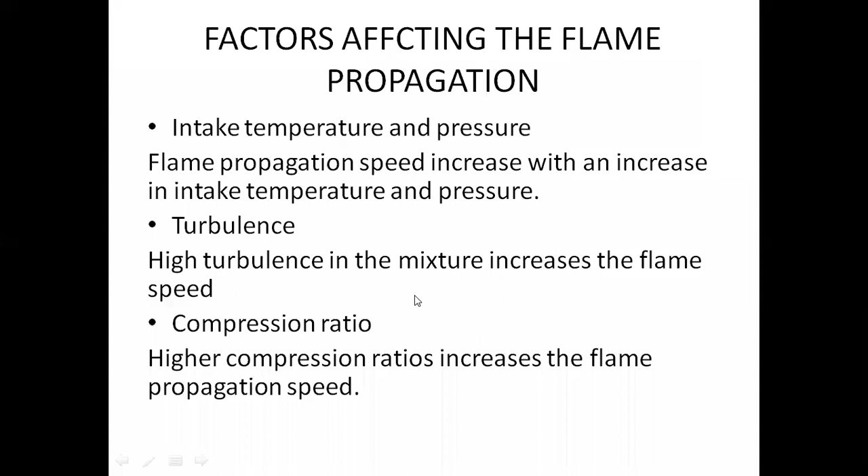Okay, so where were we? We were talking about the flame front.

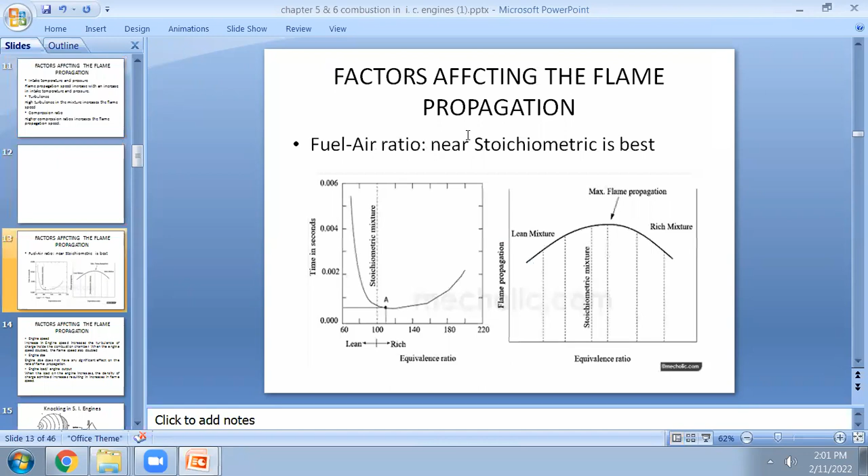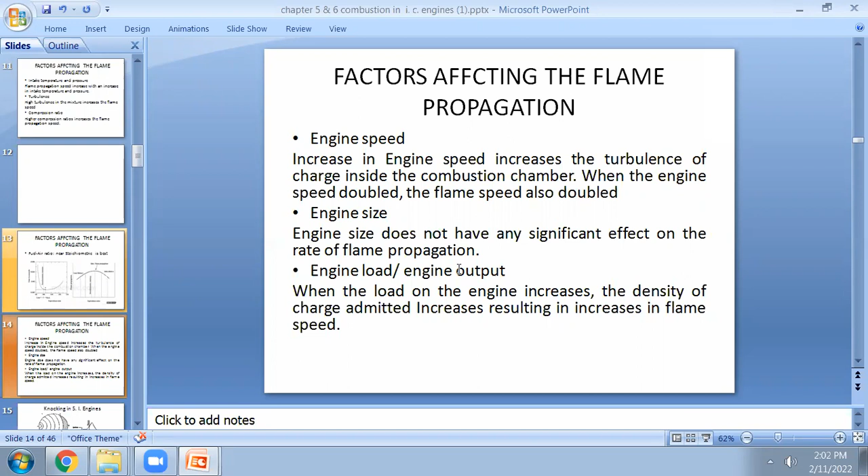So coming back: as the inlet temperature increases, flame velocity increases. As the pressure increases, the flame velocity increases. As the turbulence increases, the flame velocity increases. As the compression ratio increases, flame velocity increases. The stoichiometric mixture gives the maximum flame velocity. As the engine speed increases, the flame velocity increases. Engine size does not have an effect on flame velocity. As the engine load increases, the flame velocity increases. These were the points affecting the flame velocity inside the combustion chamber. Higher the flame velocity, the better, because we are going to get maximum output, and efficiency is going to be higher.

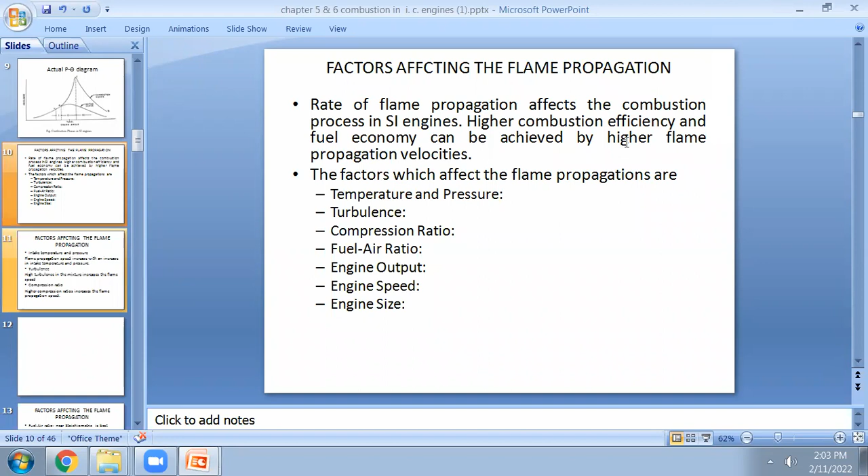The rate of flame propagation affects the combustion process in SI engine. Higher combustion efficiency and fuel economy can be achieved when the flame propagation velocities are higher. Now why higher? What happens after it becomes higher? Let's go back. Higher flame velocity means higher compression ratio, and higher compression ratio means output is higher. We learned this in the first chapter itself - higher the compression ratio, higher will be the output of the engine. So that indirectly means that higher the flame velocity, higher will be the output of the engine.

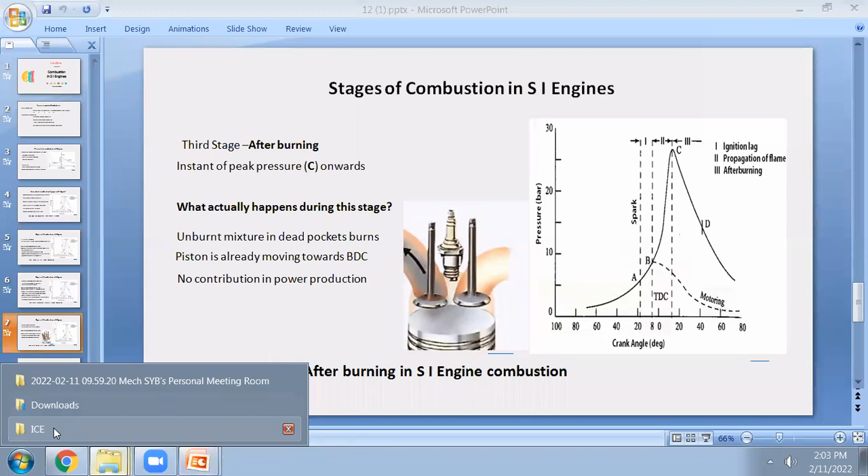Okay, so I assume that everybody has understood all the points we have discussed now. Is anybody in the class who has not understood whatever the points we have discussed till now? Anybody in the class who has not understood whatever is being discussed in the class? Anybody?

Can you unmute and somebody speak? The unmuting isn't working, has something happened due to some setting issue on my end that you can't speak? Why is nobody unmuting and speaking? Is there anybody? Yes sir, understood, we can speak on the chat but we will not speak unmuted. Okay, doesn't matter.

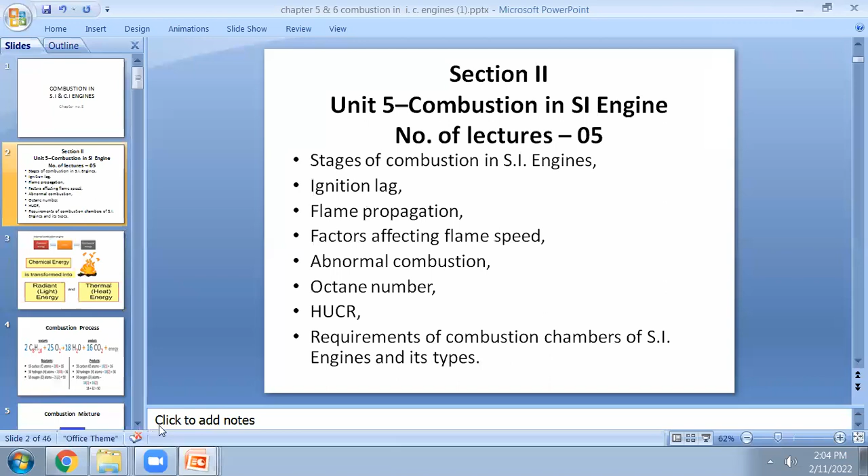Okay, so now let us move on to the next point, that is abnormal combustion in SI engine. We have discussed stages of combustion in SI engine, ignition lag, flame propagation, factors affecting flame speed - all these points we have discussed. Now we'll move on to abnormal combustion.

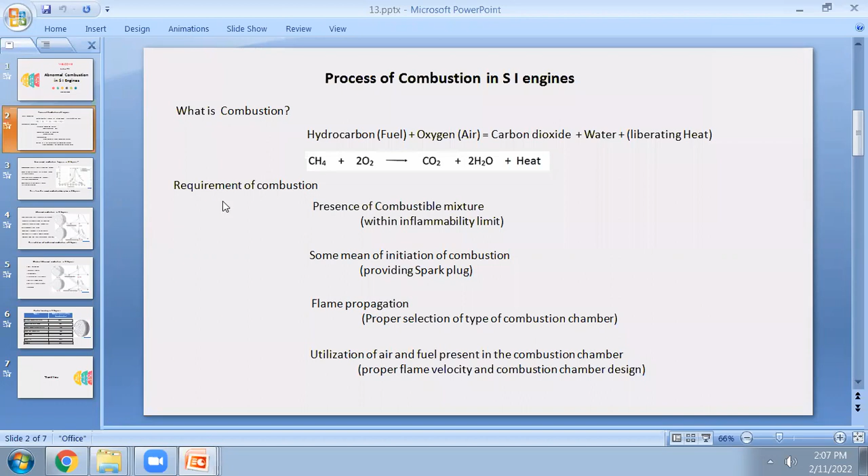This will decide, that is the type of the combustion chamber will decide how much the flame velocity is going to be there, along with other parameters like temperature, pressure, turbulence, compression ratio, speed of the engine, and so on. So these were the requirements of combustion, and when all these requirements are met, we have combustion. And combustion happens in 3 stages.

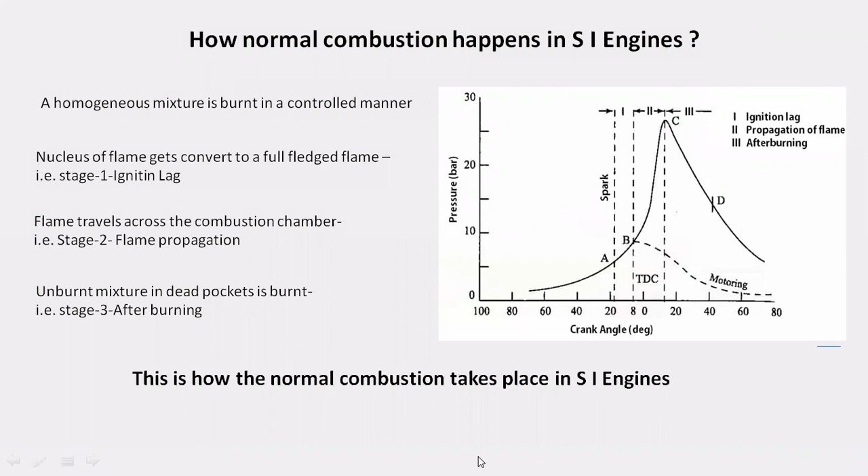And if everything happens as per how we've designed the engine, then we call it normal combustion. So I hope everybody has understood what is normal combustion. Let us once again understand how normal combustion happens inside a combustion chamber with the help of a diagram.

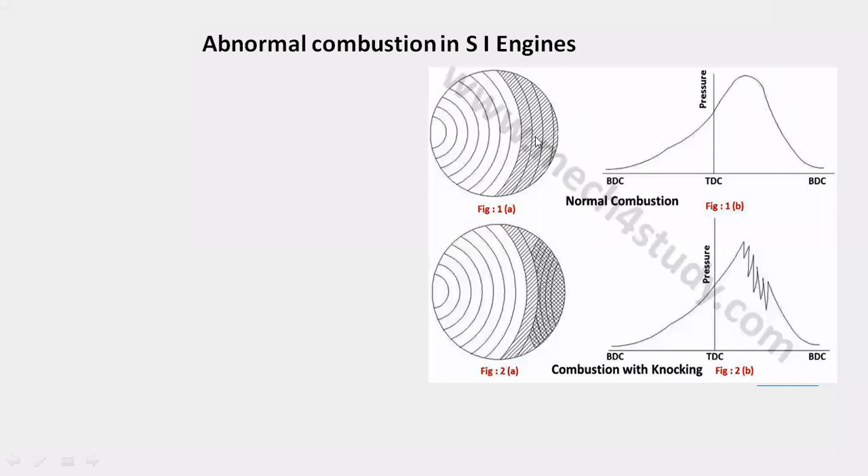Okay, so here this is what we discussed. The flame generated by the spark travels across the combustion chamber. End mixture gets compressed by the flame front. This is your end mixture - कारण आपण इथून चालू करतोय म्हणून ह्याला आपण पुढचा एंड म्हणतो, पुढचा टोक. End mixture is getting compressed due to flame front.

The end mixture reaches self-ignition temperature and it is burning as the flame reaches over there and burns it. Okay, and it burns. Mixture completes delay period. Now what is this delay period? Ignition lag period. Here, ignition lag period.

Wrongly I have written the word delay. It is a ignition lag period.

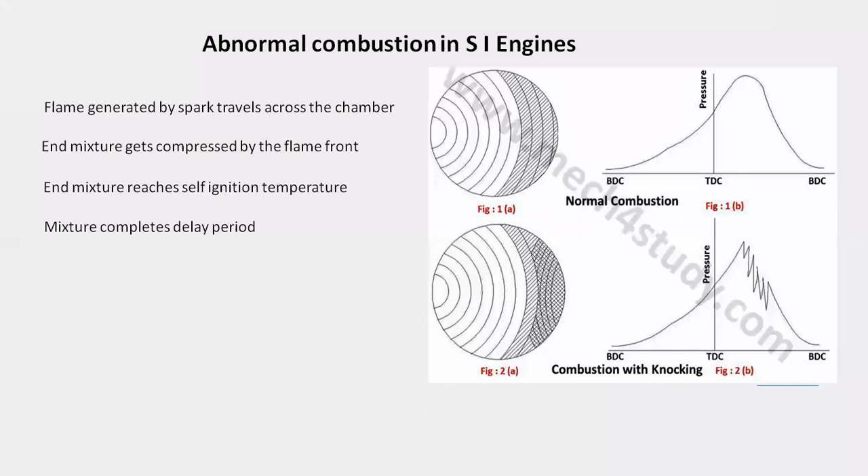The mixture completes its self-ignition temperature, reaches the self-ignition temperature, then further the mixture completes its ignition lag and a new flame is developed inside the end mixture. So now we are talking about abnormal combustion.

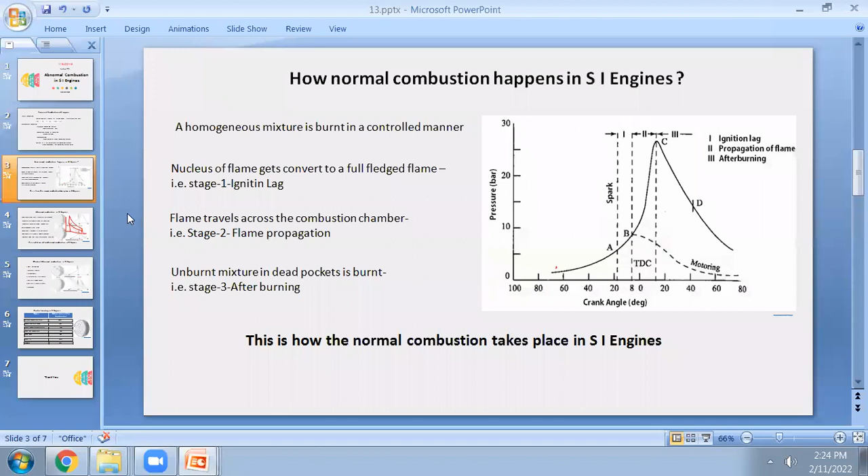So that is what we are expecting as a designer. As a designer, what we are expecting? We are expecting that the end mixture should not reach self-ignition temperature. त्या कंडिशनपर्यंत पोहोचू नये हीच आपली अपेक्षा आहे. So that is what our expectation is. या केसमध्ये end mixture is not reaching self-ignition temperature.

म्हणजे सेल्फ इग्निशन टेम्परेचर म्हणजे प्रेशर वाढतंय, टेम्परेचर पण वाढतंय, परंतु ती टेम्परेचर आणि प्रेशर सेल्फ इग्निशन टेम्परेचरला पोहोचायच्या अगोदरच आपली फ्लेम तिथपर्यंत पोहोचते आणि त्याला बर्न करून टाकते. दिस इज कन्सिडर्ड टू बी गुड कंडिशन, कारण तिथलं मिक्सचर तयार झालंय, बर्निंगला तयार झालंय आणि आपली फ्लेम पोहोचले की ती लगेच बर्न पण होते.

म्हणजे पिस्टन खाली गेलं आणि नंतर बर्न झालं असं होत नाही, कारण तोपर्यंत आपला फ्लेम तिथपर्यंत पोहोचलेला असतो. म्हणून आपण म्हणतो, हायर द फ्लेम स्पीड इट इज बेटर. कारण जेवढं फ्लेम वेलॉसिटी जास्त असेल तेवढं लवकर तिथपर्यंत पोहोचून तिथलं मिक्सचर बर्न करून टाकतं, म्हणजे ॲबनॉर्मल कंबशन होण्याची वेळ येतच नाही. म्हणून आपण काय म्हणालो, हायर द वेलॉसिटी बेटर. करेक्ट? येस.

Okay, so this was the things what we have discussed. Now moving ahead, effects of abnormal combustion.

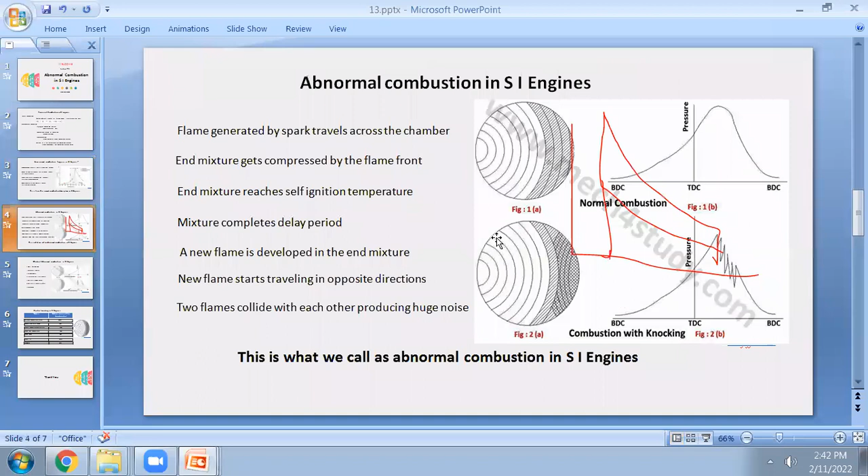मराठीत सांगतो, ज्या वेळेला नॉकिंग होतं त्यावेळेला टेम्परेचर आणि प्रेशर दोन्ही खूप जास्त असतं. प्रेशर वाढलं म्हणजे लांब असलेले हायड्रोकार्बनचे मॉलिक्युल्स जवळ आले. जवळ आले म्हणजे सगळ्या हायड्रोकार्बन मॉलिक्यूलला ऑक्सिजन मिळेल याची गॅरंटी नाही. हीट आहे कारण टेम्परेचर खूप जास्त आहे. Due to heat hydrogen evaporates but they are unable to burn. So carbon remains, and that particular carbon is in the form of carbon deposit. अशा प्रकारे काजळी कंबशन चेंबरच्या आतमध्ये तयार झाली.